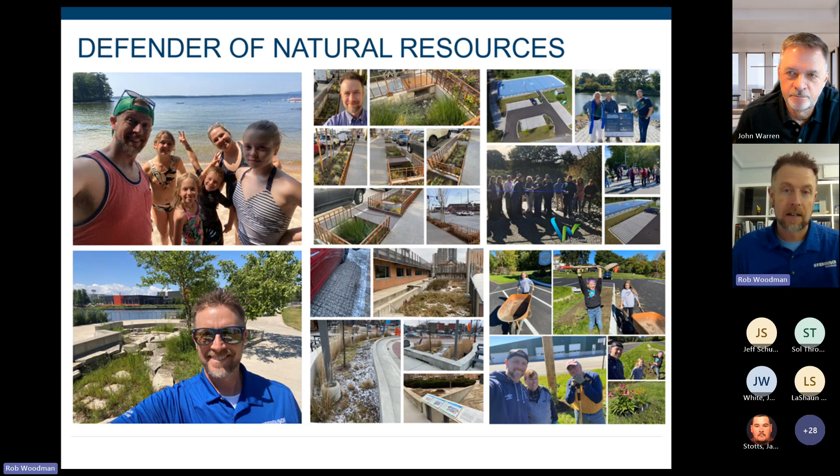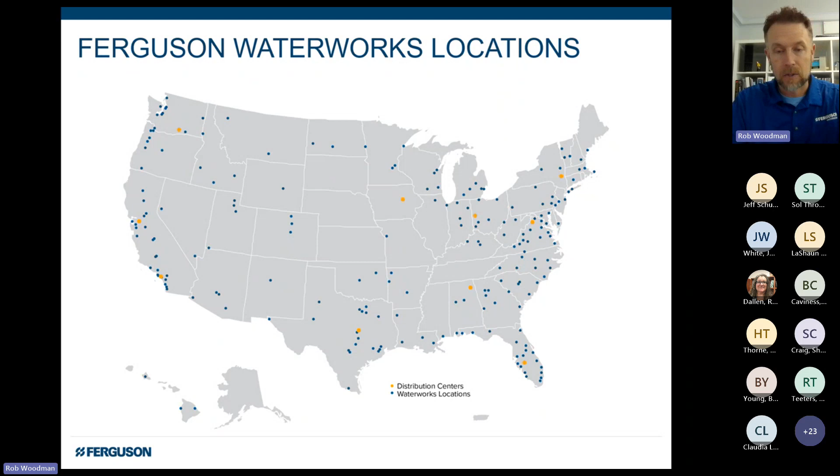When it comes to managing wet weather on the private and public side, what I hope to do in these presentations is share some of what I've learned in other parts and bring it back to you locally in a way that might positively impact how you're going about implementing stormwater and retrofit projects in your neck of the woods.

As a starter, we do everything in that site development space. So whether it's silt fence, dewatering bags or silt sacks, TRM - turf reinforcement mats, erosion control blankets, geogrids, fabrics, vegetated walls, scour protection, slope stability solutions - we kind of cover everything.

We're not going to get into these things today, but if you have any needs for these types of solutions, both myself and even more so John are a great resource for you. Don't hesitate to reach out. If anything on this map has you wanting to know more right now, let us know and we can set up a small 15, 30-minute call at some point to go through those things.

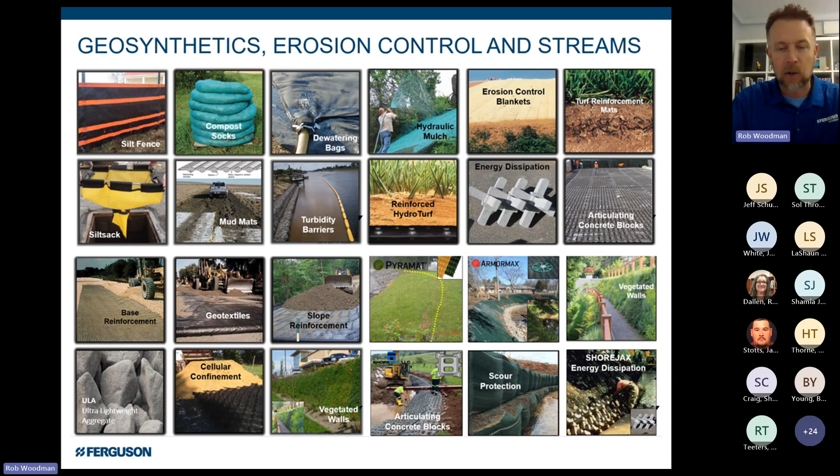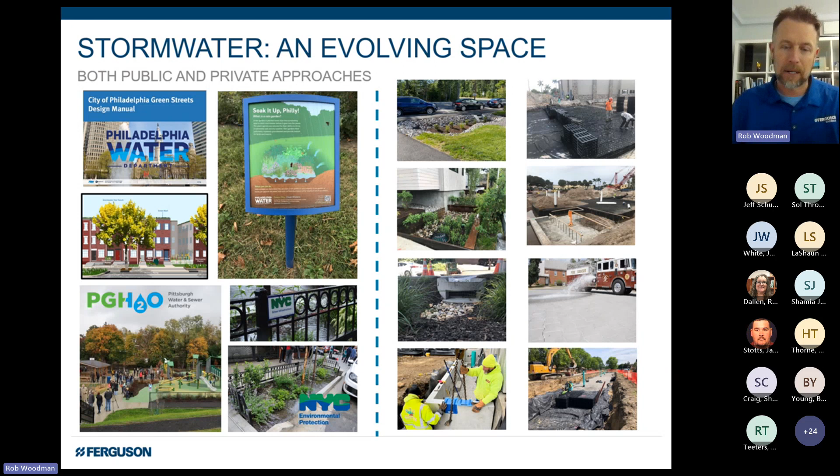But today we're really going to spend time in the stormwater space. We work both on the public and the private side. While there's a lot of similarities, both have their own unique challenges, and we try to address those in the different approaches we have, or the influence and leverage we have when it comes to supporting designs we're on. We keep finding a lot of key challenges or common issues that come up, and we've built our suite of solutions to address those.

Space efficiency is probably the biggest one. We've got less and less space to work with, we're dealing with poor soils, and we've got to do more with less space. At the same time, precipitation is increasing, so we're getting more regular, more intense rain events. We're having to adjust the way we size when we think about resiliency and climate change, and we're trying to position our solutions to be helpful there.

We've got to be versatile and flexible. We have to work around weird conflicts that you might find when you dig a hole in the ground. High performance, whether that's for structural integrity or for water quality. Easy to maintain - no longer is maintenance just a nice little manual that gains a thick layer of dust on the shelf.

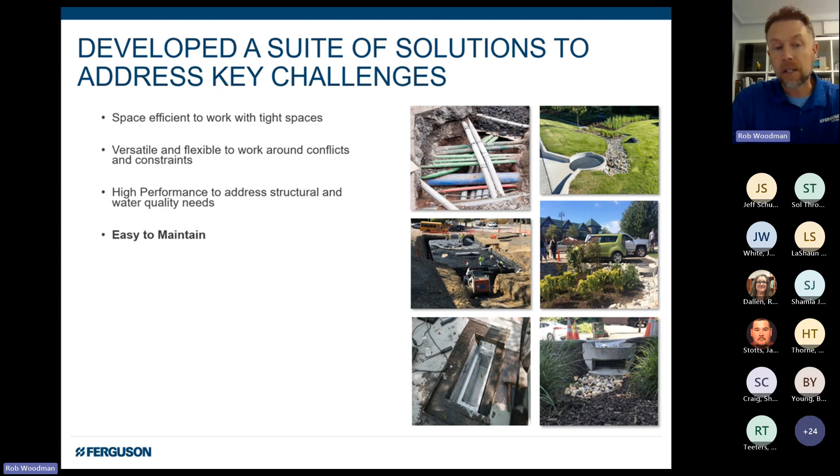Folks are actually having a look at what it looks like to not only install practices, but then deal with the ongoing cost and workforce needed to maintain and help them look good and continue to work moving forward. Cost appropriate is always important, along with the ability to adapt for resiliency and manage some of these pieces that are coming into play now with larger storm events that we're having to manage.

And then from a city scale, probably more on the public side of things, one of the challenges I've seen as I've consulted with New York City and Philly and other areas is we keep coming to this conclusion that we need better pretreatment, better screening, a better way to protect our primary assets. Because when we protect those assets, we allow them to do what they were designed to do. And the focus of maintenance now becomes simple filters and screens, which are easier, lower cost, and quicker to maintain.

And if you do all three of those things, the chances of maintenance happening generally goes up. So you're going to see that smattered throughout the presentation today - this common theme of essentially voluntary pretreatment, not always regulatorily required, but a really good way to protect and keep the life cycle costs down with any kind of either subsurface or surface green infrastructure practice.

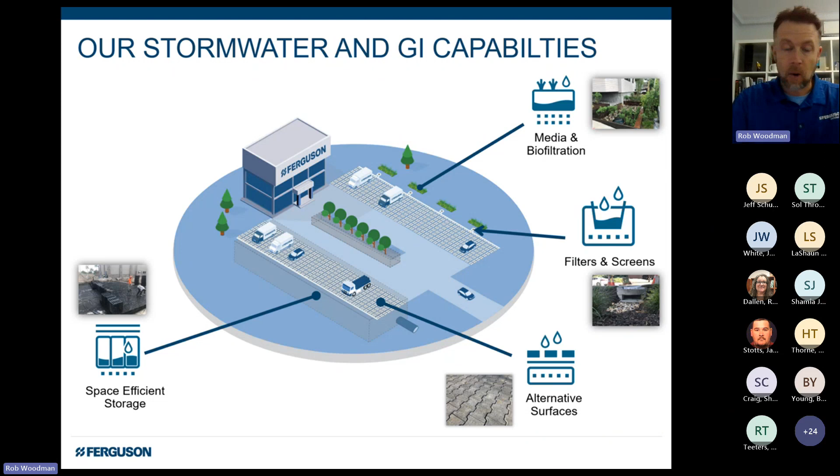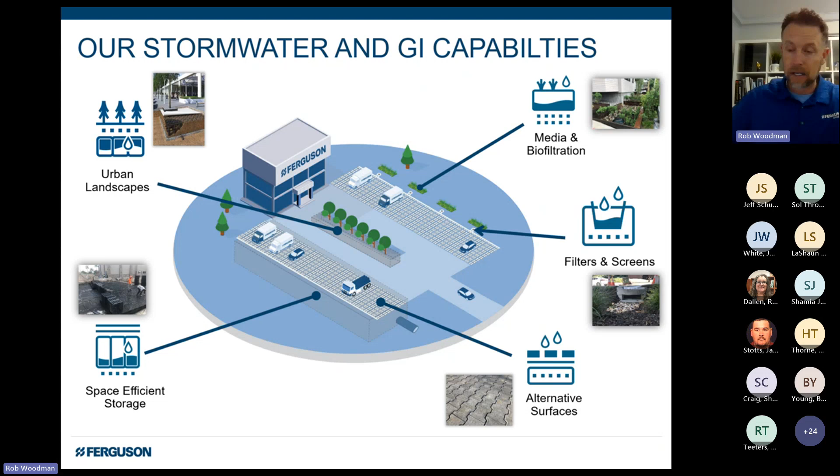So diving into it, we're going to go through 5 chapters. We're going to talk about space efficient storage, filters and screens, media biofiltration, what we call alternative surfaces or permeable or porous surfaces. And then finally, we're going to touch a little bit on what we call urban landscapes, where we're actually using soil cells to promote tree health in urban settings.

On the space-efficient storage side, Ferguson is a distributor of many, many different products, and we're a large distributor of Waterworks products.

So we get access to a lot of different systems. We work with arch chambers, large diameter pipe, concrete storage systems. But today we're going to really focus on the lower right here, the R-Tank. R-Tank is an own brand product of Ferguson's.

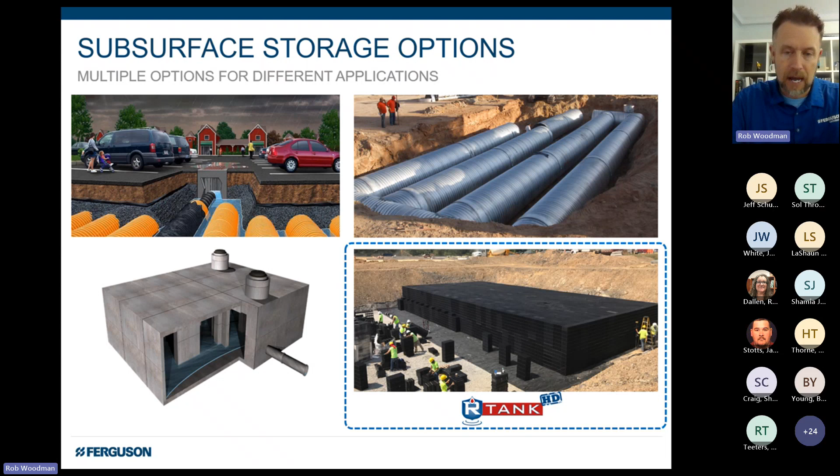And again, the more and more we get space constrained, the trickier some of these sites become, and R-Tank becomes a more and more useful solution. We have R-Tank systems going in across the country every day to solve issues related to stormwater storage. So the R-Tank, it's a very simple concept.

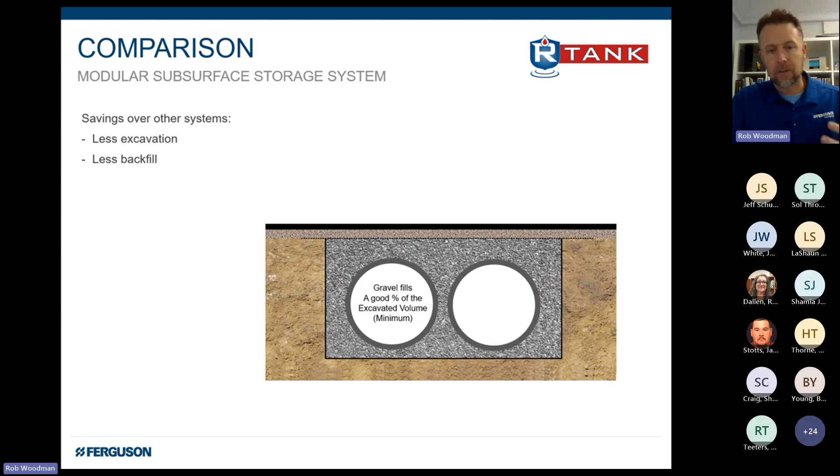Instead of using your typical pipe with stone backfill or your arch chambers with stone backfill, we're using a 95% void space module to really maximize the storage. So we're minimizing excavation, maximizing storage. And that's really the key with R-Tank. It's that high void space, the ability to maintain traffic load ratings, which we'll talk about in a minute, minimize excavation, maximize storage.

Like I said, high void space allows us to keep systems shallower so we can avoid groundwater. Our modularity, which we'll talk about in a second, allows us to work around unexpected utility conflicts in the field. We've got different height modules, anywhere from a mini up to a single plus mini, double, triple, quad, finally up to a pent, which is essentially five segments high. It's about 7 feet tall.

And if you look at my camera, this is a miniature model. This is not the real thing. This is actually essentially a double module that I have here. And you'll see that it has a common mid plate. So when we assemble a double, it's made as one monolithic matrix of plates. We're not dealing with two independent pieces sliding around on top of each other.

There's a few other systems out there that do that, and they've had some troubles because if things aren't perfectly lined up, you don't transfer the load correctly, and then you can get into a bit of a pickle. So we make them all as a monolithic matrix of plates. We have different strength ratings for different cover conditions.

Our heavy duty or HD, minimum of 20 inches of cover, up to 7 feet of cover. Our super duty, up to 10 feet of cover. The UD or ultra duty only needs 12 inches of cover to be HS25 load rated, which is pretty unique. There's not a lot of systems out there that can support that traffic that close to the surface. And then we finally have what's called our XD or extreme duty panel.

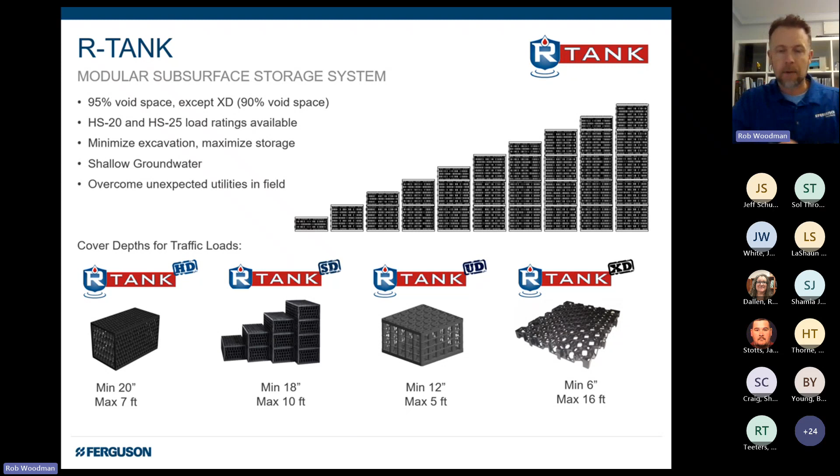It's a 2-inch panel that can be stacked in multiple lifts that we can use with very deep or very shallow conditions. As you can imagine, they get a little bit more expensive as you go from HD up to XD. So on projects, we generally start with the HD. We try to see if that can work with the various site constraints and specifics. And if it doesn't, we can steadily work our way up through the range from there.

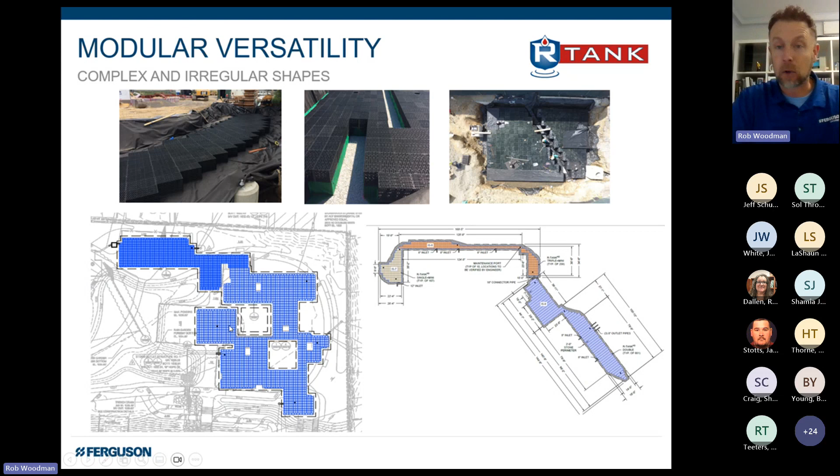Again, being a modular system, the tank's about 3 square feet in footprint. So we can work with complex shapes and work in and around different obstacles, which is a really nice thing. This is a project we'll talk about a bit later, but it had some spaces left out for some deep playground equipment foundations, actually. So we're able to work around that and get it done.

We also have what we call maintenance modules. If you look at my camera again, you'll see we have modules that have circular plates in them versus the standard plates that are more of a webbed kind of plate. We use these tanks at the points that pipes enter the system. You'll see here the red line on the engineering section, where pipes enter the system.

We'll wrap that row independently with fabric to trap sediment and debris or isolate it into one location, where we can, with a combination of ports at each end as well as inspection ports throughout, flush, resuspend solids, and vac them out. So that's our treatment row or our maintenance row.

While we have that, I'm honestly a big fan of upstream pre-treatment for any system, whether it's pipes, chambers, tanks. It really doesn't matter. I'm yet to meet any owners on the private or public side who get super psyched about spending their extra money on cleaning subsurface storage systems. So we find that pre-treatment's really a good place to go.

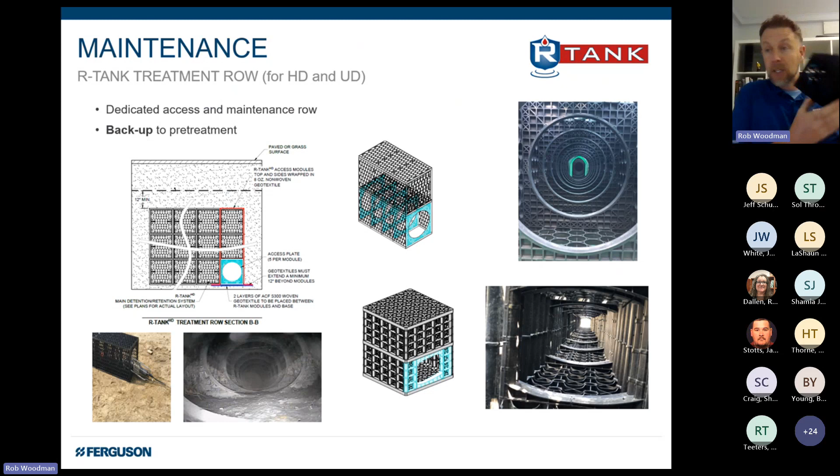And that's a trend we're seeing, especially on the public side, folks looking at smart, decentralized filters and screens just to keep that material out. It's much easier to clean a catch basin than to be searching for material all over subsurface systems. But we do have that circular plate as a backup should you need it.

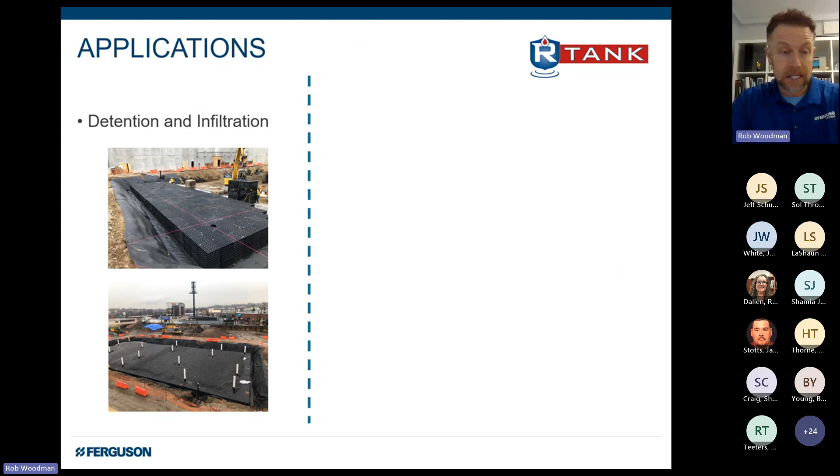You could probably also imagine, most applications for this is stormwater detention and infiltration, depending on your soils. But we also have folks now using it in a lot of more unique or innovative ways, right? So enhancing storage under permeables, folded into linear green streetscapes, under bioretention. So instead of using, say, stone at 35 to 40% voids, we can increase that void ratio to 95% and get a lot more storage. So enhanced storage under bioretention, combined with innovative medias, which we're going to talk a little bit about later when we get to our media and biofiltration section. And then also harvest and reuse, right? So a lot of different ways to do it.

Typical section, pretty standard, 3 to 4 inch stone base, set those tanks, wrap them with a fabric. We do call for a 2-foot stone side perimeter, just so you have enough room to get in there and work that material up in lifts. There's a number of systems I see out there in their standard details that only call for 6 inches or 12 inches. That's really not enough room to get in there with a plate compactor to build that up. So we recommend 24 inches. On some of our linear projects, we're a little bit more flexible and get down to about 12 inches, but we try to start with 24.

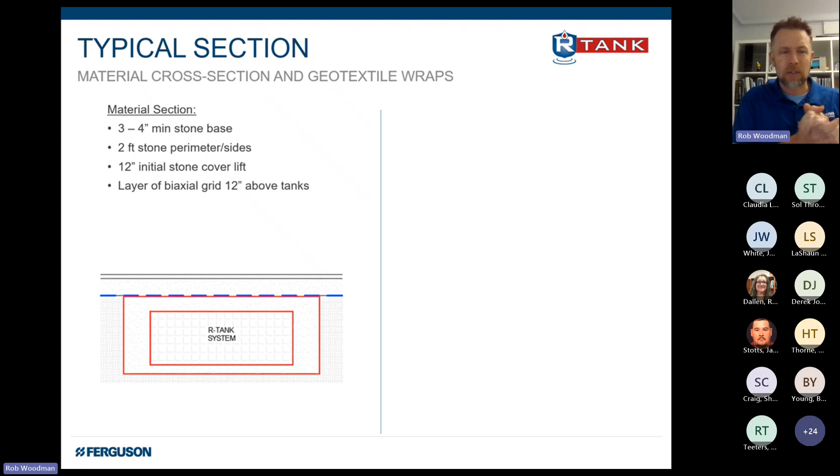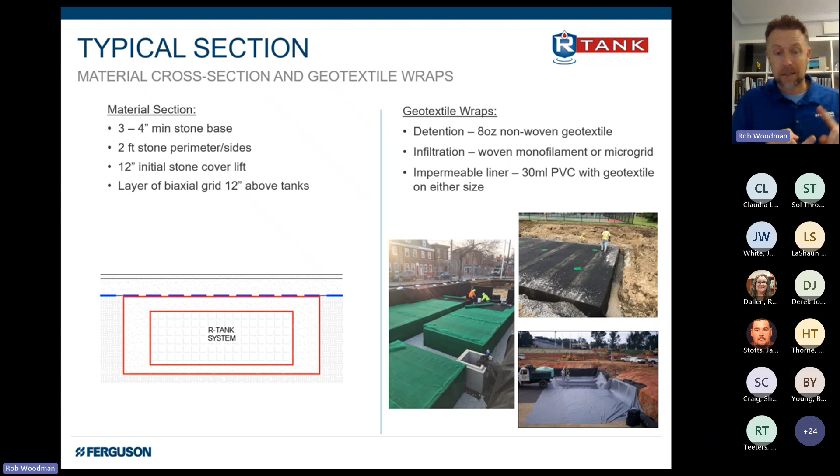And then again, we're wrapping tanks with fabric. We're a geo company, so we're not just shipping tanks to the site. We provide the tanks, the pipes, the inspection ports, the boots, the fabric wrap, the liners, all the different parts you need. And we have recommendations for the geos depending on what your application is. So if you're doing detention, we generally use an 8-ounce non-woven. Infiltration, we'll use a woven monofilament or even a microgrid material you might see on the screen here. So like these small biaxial geogrids that we can use just to stop backfill from going into the tank, but essentially be clog proof. And then when we need an impermeable liner, we'll generally use a 30 mil PVC.

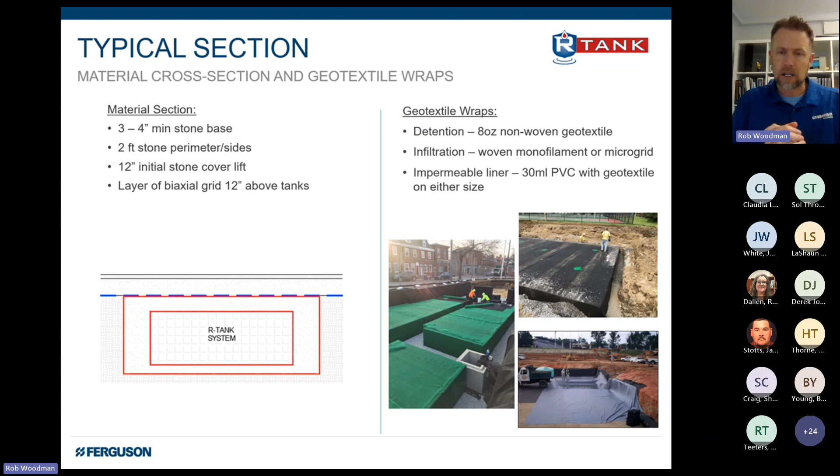We supply HDPE, LLDPE, RPE, PVC, all the different liners, but I would say 90% of the projects we ship have a PVC liner. And I think that's because PVC is pretty flexible, even in the colder months. So it's easy to work with, and you can use a specialty glue or adhesive to seam the seams when you're connecting parts and pieces versus needing specialty heat guns or welding equipment to do that.

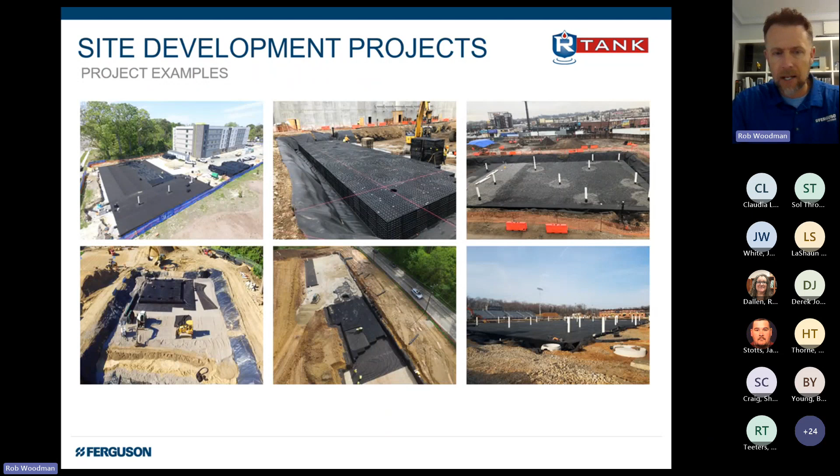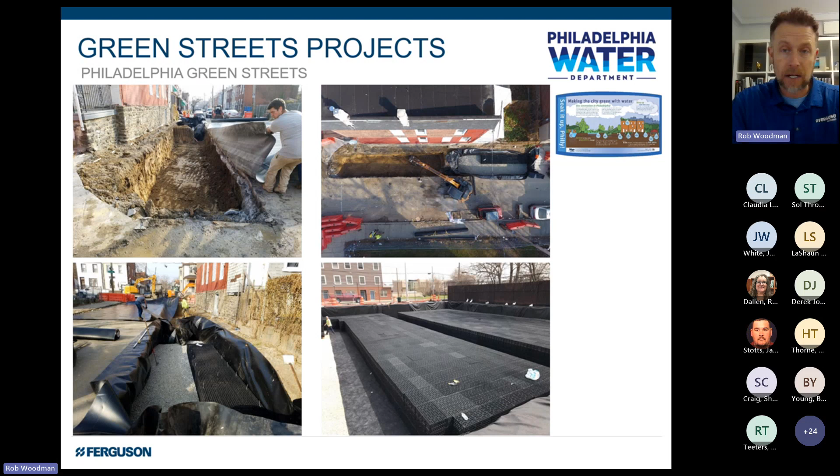Examples: parking lots, stores, hotels, sports fields, all kinds of different uses. Again, linear green streetscapes. We do a lot of work in Philly where we do small numbers of tanks in the urban right-of-way to provide volume storage. Pittsburgh's an area I've also done a bunch of work, where Pittsburgh has steeper streets, so we do a lot of terraced systems there to work with the adjacent grades. And again, I showed this image earlier with the playground, but you can see again how we can work around all these different constraints, whether it's deep tree areas, light pole bases, foundations, those types of things. We can work in and around those.

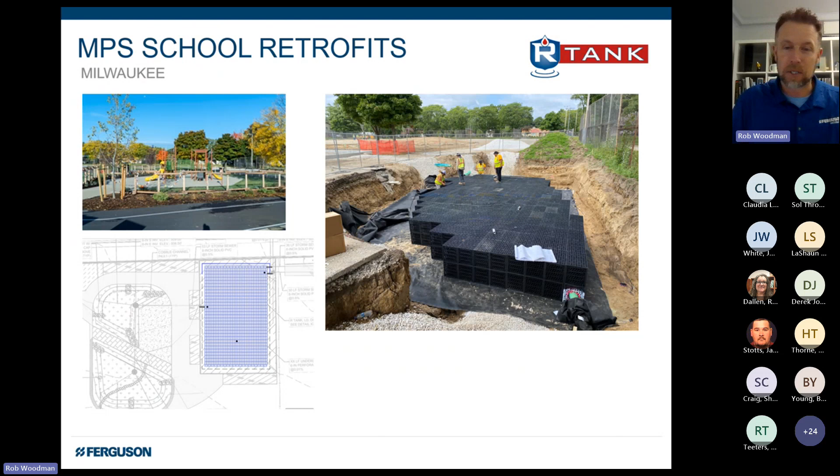More recently, we've started to be folded into a number of school-based grant retrofit projects. So we've got a number of projects going in the Milwaukee area, really cool projects, actually. Old, often fairly low income areas, so not the greatest neighborhoods, but taking school sites and turning their playgrounds from a paved playground, basically just a bunch of pavement, to a nature-based, green infrastructure rich playground, which is really fun. I think we've worked on 9 of these projects now over the last couple of years. We got another 5 this year. And it's really cool to see the way that green infrastructure isn't only helping with stormwater, but now providing a community amenity that really benefits the kids in these pretty rough areas.

Under permeables, I mentioned before, we can fold them under permeables. If you follow what's happening in New York City, the DEP is now using a precast porous gutter line detail for a lot of their retrofit projects. We'll talk about the precast concrete later, but what's interesting in those standard details is they call for either 3 high or 5 high of our 2-inch XD panels. So it's a 6-inch section or a 10-inch section underneath those. And so it's kind of interesting to see the way those modular boxes are becoming useful, even in an urban right-of-way, like we see throughout Queens and Bronx, Flushing and whatnot, all the projects that are happening over in NYC.

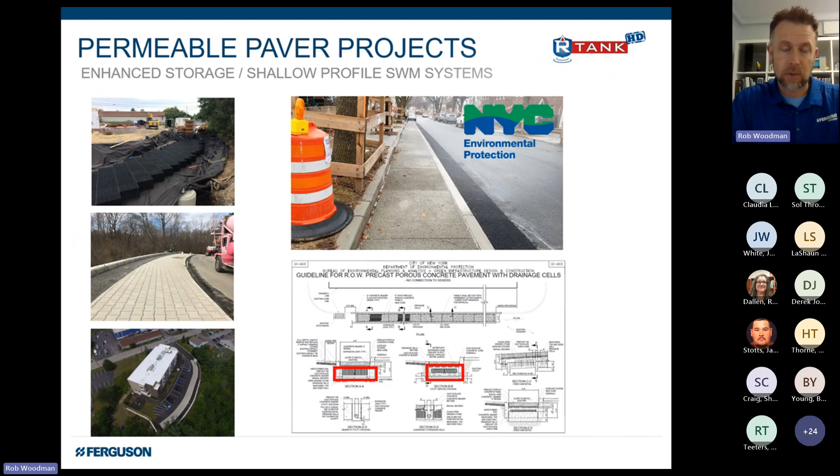I mentioned another use, harvest and reuse. This is newer for us, but we now have a formal partnership with a company called Greyter Commercial, who essentially provide a modular filtering and pump system. So we can provide the R-Tank to the appropriate size, line it with a PVC liner, and then work with our partners at Greyter for them to design the appropriate filtering system, depending on what your use is, whether it's for irrigation or say for gray water for toilets, flushing, splash pads, whatever it may be.

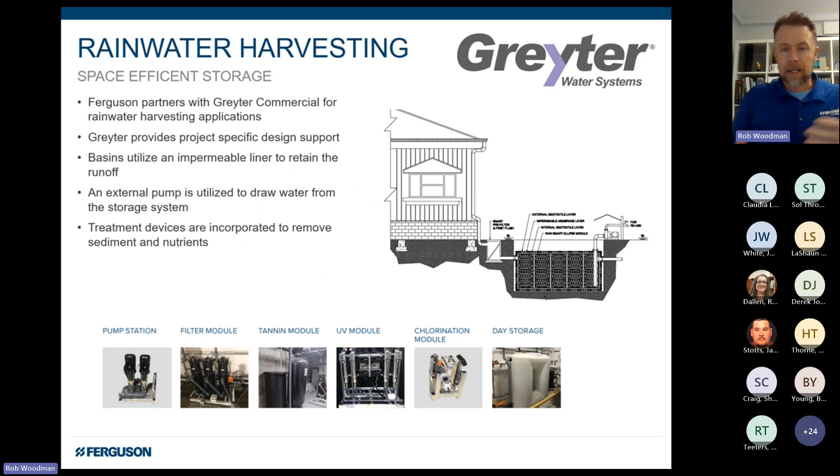That can all be packaged as one system now, which is kind of a fun thing because we're seeing more and more people say, hey, look, I've got to store this stormwater. I got no ability to discharge it from the site. I need to do something with it. Or, hey, I'm super sustainably minded. I really want to keep the water that we're generating and use it for something. Can you help? And in the past, we're like, hey, here's the R-Tank. You work out the rest. Now we can kind of do all that together.

I see a couple of comments there. Yes, splash pads. It would have to go through certain rigorous filtering before you'd start splashing kids with that water. But we can talk about that for sure.

So I talked about the treatment row with the circular plates. I think I mentioned then we kind of recommend that as backup to pre-treatment. When it comes to pre-treatment, there's a lot of devices on the market, and there's kind of two approaches. There's what we would call a centralized approach or decentralized approach. Centralized is usually a larger swirl separator or a hydrodynamic separator. Decentralized is usually some kind of lower cost, simpler filter or screen that might go in each catch basin upstream of a system like R-Tank.

And we have a whole range of them. We're not going to go through all the features and benefits of each, but whether you like screens that are down in structures, or high flow geotextile bags, or even cartridge filters for specific pollutants in the frame and grate. We work with Fabco Industries in this space. They're based out of Long Island, New York, and they've developed a bunch of really nice solutions for us.

The most common device that we use with Fabco is what we call our StormRing CPS, or connector pipe screen. This is actually a standard screening device we put with all of the drawing sets we produce for our R-Tank designs that we're working on with engineers. We used to have a screening device that actually mounted to the wall of the structure, but we kept finding that oftentimes the wall wasn't square, it wasn't flat, it was an older drain, it was kind of hard to mount to it. But the pipe itself leaving a structure was generally pretty circular. So light bulb moment, why don't we mount the screen to the pipe versus the wall?

And so the StormRing, the reason it's called a ring is it's an expanding ring. So this ring actually gets slotted into the pipe that's leaving, say, a structure. There's this turnbuckle in there to press that to the wall of the pipe to make it hold steady. And then we mount a kind of a triangular screen to the face, really to increase the surface area, so you're not just limiting the surface area to the circle of the pipe itself. And this is a simple device available in aluminum and stainless, and we go from 6-inch all the way to 24-inch.

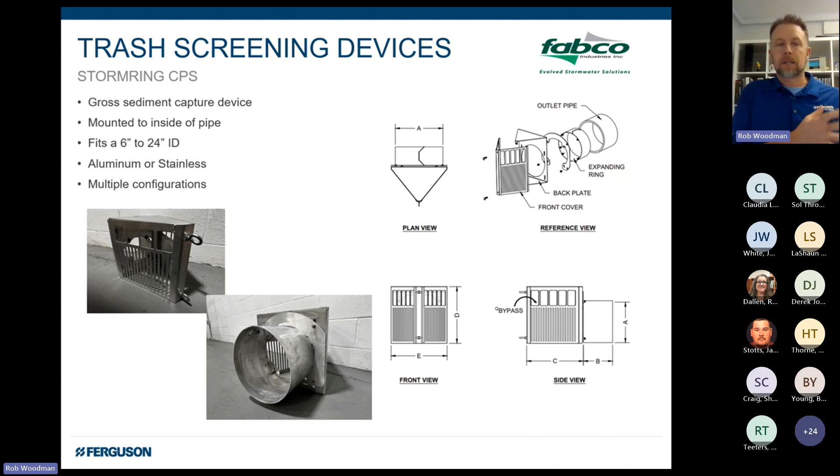And if you're working with us on an R-Tank design, if there's no apparent plan for upstream pretreatment and screening, you'll see this detail appear on our standard drawing sets as kind of a recommendation, like, hey, let's do something. It's not going to cost you a lot, but let's do something to make maintenance down the road simpler. StormRing will allow you to do that.

And then I'd also just mention, while we have a lot of devices, we've also found that we've needed to make specialty devices for various cities and towns that we work with. They might have a certain type of drain or a certain size particle they want to trap, but then another size they want to let go. And we found that every city is kind of unique. City-specific goals need city-specific solutions.

We've developed the green inlet filter series with the Philadelphia Water Department for Philly. We've also developed the inlet screen baskets for New York City DEP for their right-of-way infiltration basins. You can see that metal basket there and some push-on pipe screens that actually go behind it.

I put this on the board just to say, you don't have to be in Philly or New York to garner our time. But we realize sometimes we need to create something that works for you, either based on available space or the type of screening you're trying to provide.

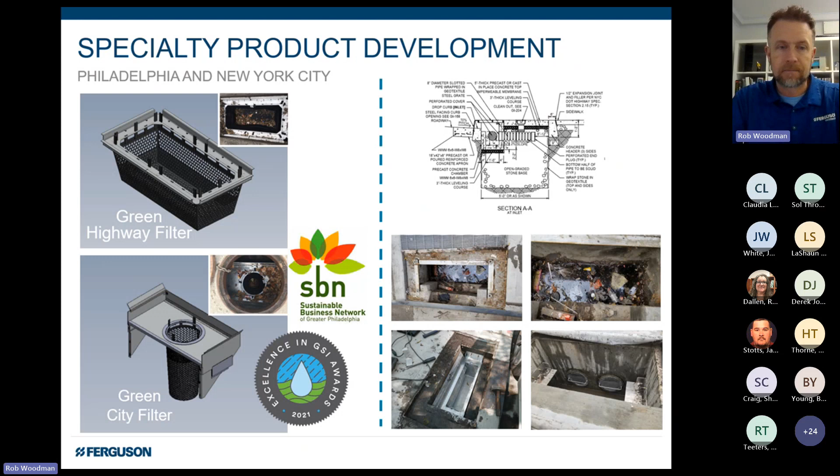So those kind of screens work for subsurface systems like R-Tank and the like. But when it comes to surface systems, things are a little bit different. Surface systems meaning, say, rain gardens, bioretention, biofiltration, bump outs.

When we think about rain gardens and bioretention, often we think, hey, we want them to look awesome. We want them to be able to filter pollutants, so provide that water quality piece. We'd love them to be maintenance free, but nothing, unfortunately, is maintenance free. Spoiler alert, if you thought maybe something would be maintenance free.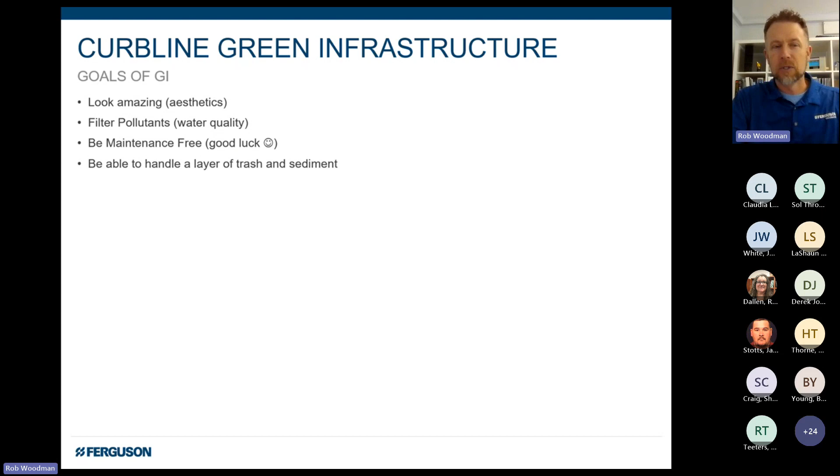But we also send all this erosive velocity and sediment to these systems, so it's a little bit tricky to really reduce the maintenance and protect these systems. We found if you have pretreatment in place, it makes it more likely you can achieve those upper goals. Pretreatment traps sediment, so you're not going to smash your plants with it or coat your surface bioretention media with it.

We can dissipate energy, so we're not going to blow out the plants. We're centralizing maintenance to some kind of screening pretreatment device versus having to hand fossick for that material all throughout your bioretention system. But we kind of get into challenges because we're trying to dissipate energy and collect sediment and debris.

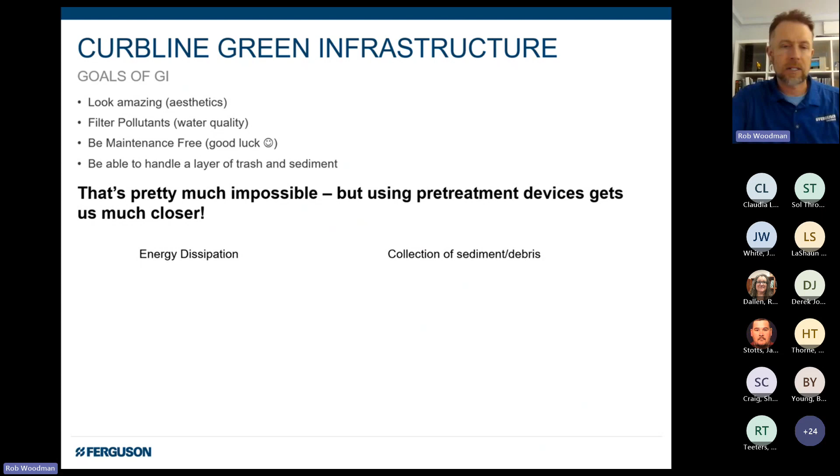If you're on a large private site development with a bunch of room, you can fit in a forebay or something nice and it's going to get the work done. Unfortunately, in the urban right-of-way with these curb line type systems, you just don't have the space to fit those practices in. This is a real challenging point.

From anywhere I travel, anywhere I look at BMPs or meet with folks to talk about them, the biggest problem location for these types of practices is that curb opening. How can we do a better job? I think a lot of times folks have just used riprap or cobbles.

Makes sense in theory, but in practice that sediment's getting bound up in there and also getting past it. So maintenance is pretty laborious because you're moving all the rocks out of the way, brooming out or vacuuming out the sediment, then putting the rocks back. It can take some time.

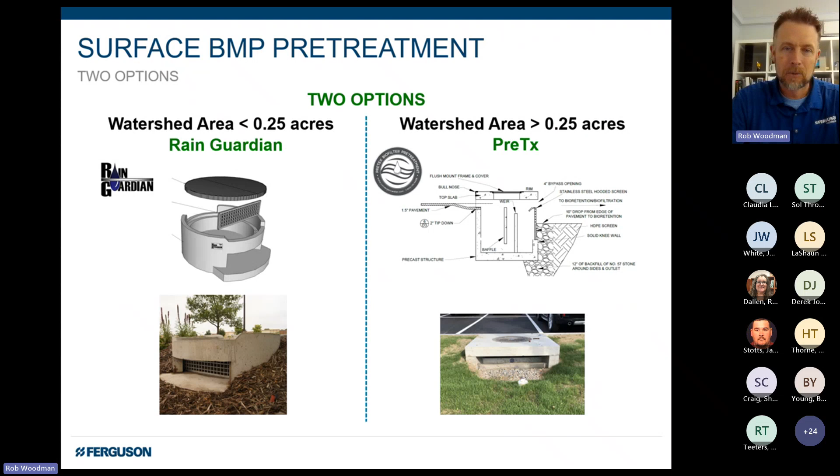So we have two devices we use in this location, and these have become really popular around the country because people are catching on to the fact that they could probably do something a little bit better to protect those systems. We have two units: one's called the Rain Guardian, the other one's called the PreTx.

The Rain Guardian is a little precast unit. I can hold up a little miniature model—it has a horizontal grate on top where a lot of the trash is going to sit, and then a vertical filter wall on the backside where any sediment and finer stuff is going to be trapped before you get out.

Yeah, Jacob, question? Hand was raised. Jacob, feel free to unmute yourself and ask Rob a question. Sorry, I think that was just a fat finger error. My bad. Oh, no worries, all good. We'll call it a high five. That sounds good.

Anyway, so these units are designed to dissipate the energy, trap the sediment, and really centralize where you do maintenance. We have one called the Turret we use on the curb line, a rectangular one called the Fortress we use when the geometry doesn't make sense for the circular, and then one called the Foxhole, which allows you to get behind sidewalks or under sidewalks.

So this still has the horizontal grate—you can see just a little bit of it there—but it also has a solid cover up at sidewalk grade, so you get your continuing pedestrian and bikeway. Usually folks will use trench drains to get water through a sidewalk, which is great for conveyance, but it doesn't have the filtering and screening elements.

So these devices, when we started working with these 5-6 years ago, folks were like, oh, it's really interesting, but I don't think we need to do it. We'll just do some riprap. Those same folks are coming back to us now saying, actually, about that Rain Guardian, we may want to relook at it. And I think a lot of that is because pre-treatment is not often regulatorily required. And when something's not regulatorily required, it often seems kind of optional for developers in particular.

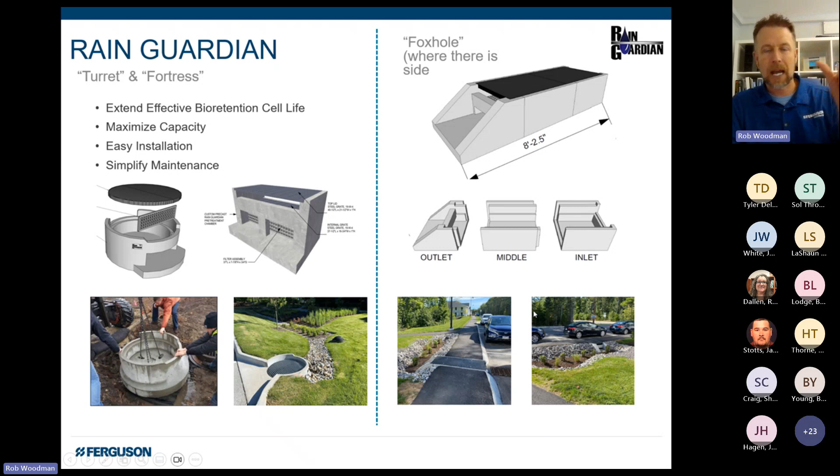The ones that don't have the pretreatment would be kind of the opposite of that. So they really do their work. And I would argue that in one maintenance visit, you're probably going to get the return on the investment in terms of that cost differential between putting something like this in or not.

Then we have the PreTx, which is a deeper piece of precast. So it's just for larger watersheds. We've got a formal sump now, a suspended baffle, a weir, and a screen on the backside. So that's just for the larger watersheds.

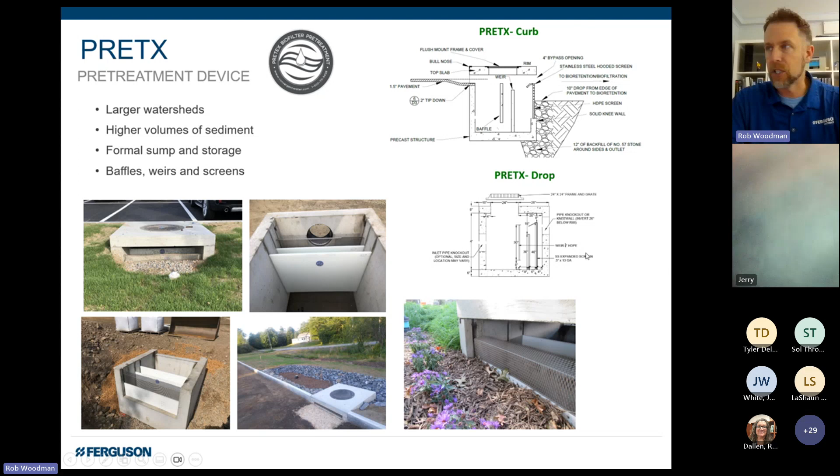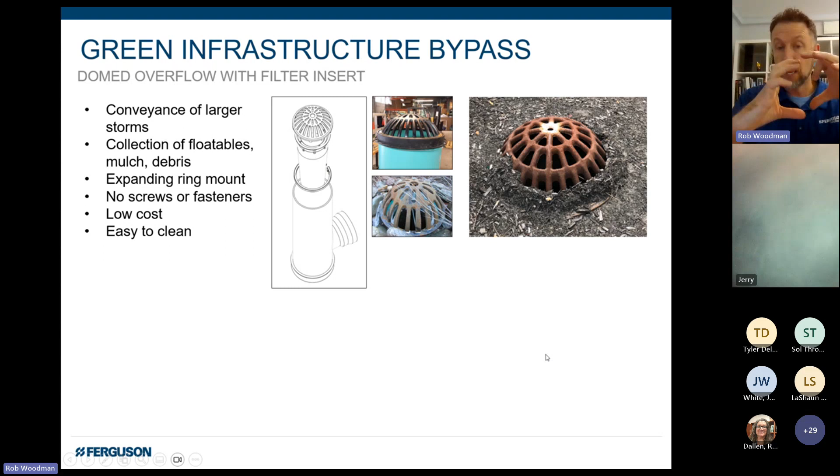We also have found a problem area at bypass locations. So a lot of surface green infrastructure will treat a certain amount of runoff, an inch or an inch and a half, or some kind of 1-year event, whatever it may be. And then larger events bypass, usually through some kind of internal overflow, like these domed overflows. We found that that's also the place where you get this kind of cocoon of mulch, and a lot of that sneaks through and can potentially clog small under drains or even orifice controls that exist downstream.

And so we now put in high flow geotextile bags in all of our domed overflows. This is an extremely low cost item that you can retrofit existing overflows with, just so you have a place where you're going to trap that material. And while these baskets don't fill up rapidly in the course of a year, enough material accumulates in these to make me think, yeah, I'm glad this is here, because otherwise you wouldn't be accounting for that. It would just be going somewhere downstream and potentially clogging things.

So we've seen a number of cities that we work with now retroactively put these in their bump outs or even include it as a standard detail so that there's some of that protection for the bypass.

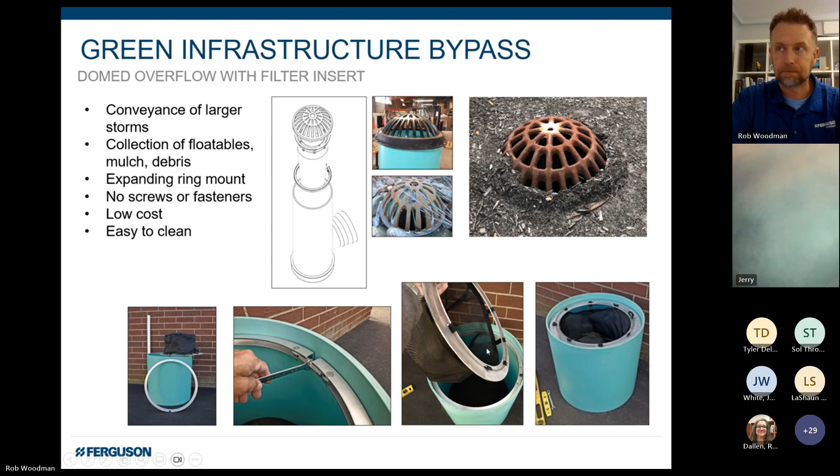On the median biofiltration side of things, we work with a company called Convergent Technologies that makes a product called the Focal Point. The Focal Point is a high flow biofiltration system. We're not going to spend a ton of time here today, but if you're not familiar with high flow biofiltration, the basic idea is you're using high flow rate media. So we use 100 to 160 inch per hour media.

So instead of having a large bioretention system that maybe is processing water at say 2 to 5 inches per hour, we're speeding that rate up considerably, up to 100 inches per hour or more, which allows us to justify shrinking the footprint. So the focal point is generally going to be about only 8 to 10% of the size of a typical bioretention or rain garden. We've gone through some great testing to get through a number of regulatory approvals where proprietary products need those.

But the nice thing is when you have a small footprint, you have less disturbance. When you have a smaller footprint, you have less area to maintain, assuming you have good pretreatment. What I love about it, especially on the public side, is it now gives you opportunities to fold surface green infrastructure into locations that were maybe previously overlooked. So maybe you were looking at a space along the roadway and you're like, oh, a rain garden would be awesome, but based on the volume coming to it and the space available, we can only treat, say, 0.2 of an inch. With Focal Point, you could treat the full inch and a half in that same space. So that's a nice benefit. You can really limit disturbance and maximize performance.

And that's a common theme, right? When we think about our tank, what that offers, there's some similarities there to the Focal Point.

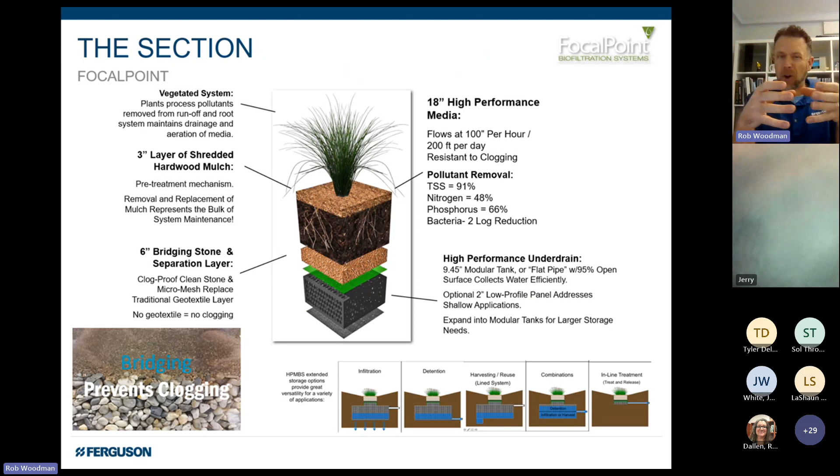That gives us water quality, not a lot of internal storage for volume control or water quantity, but then after treatment, we can expand our R tank out over a much smaller footprint. So instead of bioretention or rain gardens taking up that entire surface, or real estate area, where you can't do much else in the space, we have these smaller focal points drop down that can replicate what would have been surface storage, subsurface.

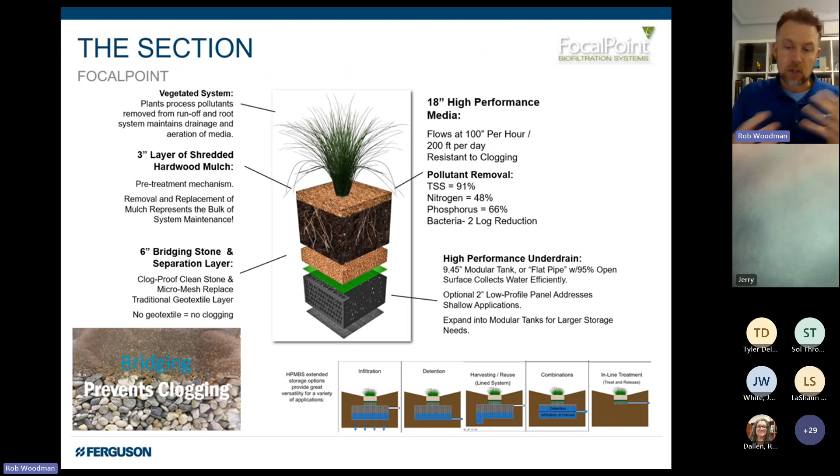Obviously, subsurface storage is always more expensive than surface storage, but when you're space limited and trying to maximize your parking or minimize your disturbance, you can do a lot of good work with focal point.

Oftentimes we think about water quality here and water quantity there, and we're not combining the two. But with focal point, we're kind of putting one over the other and can get it done.

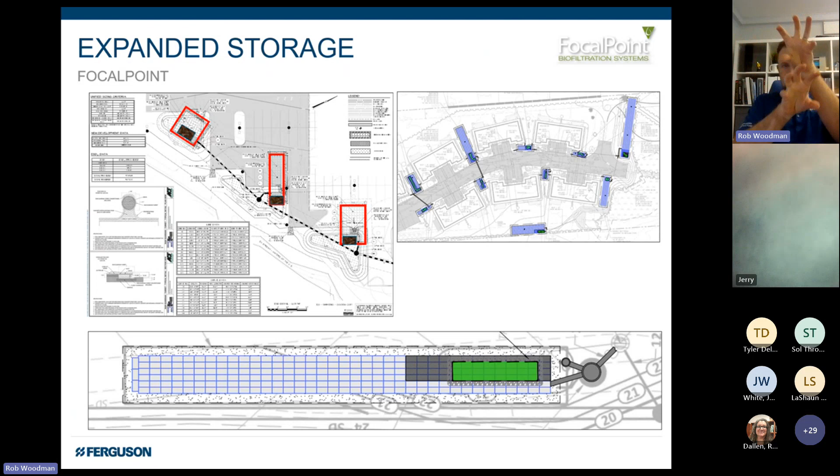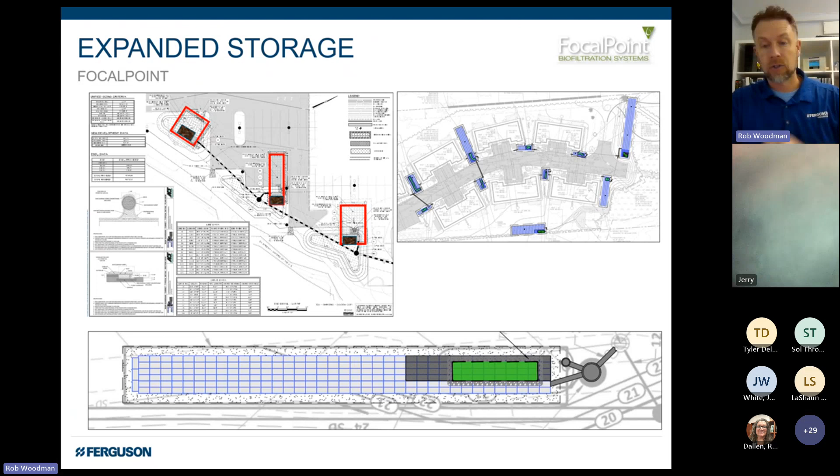Not all the projects we work on are like that. Some are just a bunch of focal points around the site, then piped to one central system, maybe chambers, maybe R-Tank, maybe a dry pond. Other projects, depending on how things are laying out and how the modeling is working, each focal point has its own independent storage, sometimes with its own independent outlet controls as well. So again, a lot of versatility, not taking up a lot of space at the surface.

It's also boxless. So everything comes in components to the site, and you don't need to buy an expensive concrete box. You also have a lot of flexibility with the shape. It doesn't have to be a perfect rectangle, as much as a lot of civil engineers I know love a good 90-degree corner and a nice rectangular shape. You can be more creative if you want to be daring. But everything comes in components, pre-mixed and certified.

Dig a hole, line the sides with a basic fabric, place the R tank, wrap it with a micro-mesh, bring over a bridging bag of bridging stone, place that in the hole at 6-inch depth, 18 inches of media. Finally, we temporarily cover it with fabric just until everything upstream that's feeding it is stable.

Pavement's down, slopes are established. Once that's done, we take the fabric away permanently and place the plants in the mulch. Then the system is active and ready to receive runoff. So it's a very straightforward process.

We put ourselves out in the field for all of the installation so it gets done right.

I won't get a ton into sizing right now, just for sake of time, but the important thing to know is that we only need 174 square feet of focal point for every acre of tributary area. So if you think about an acre of parking or an acre of pavement, that's basically one parking space worth of focal point.

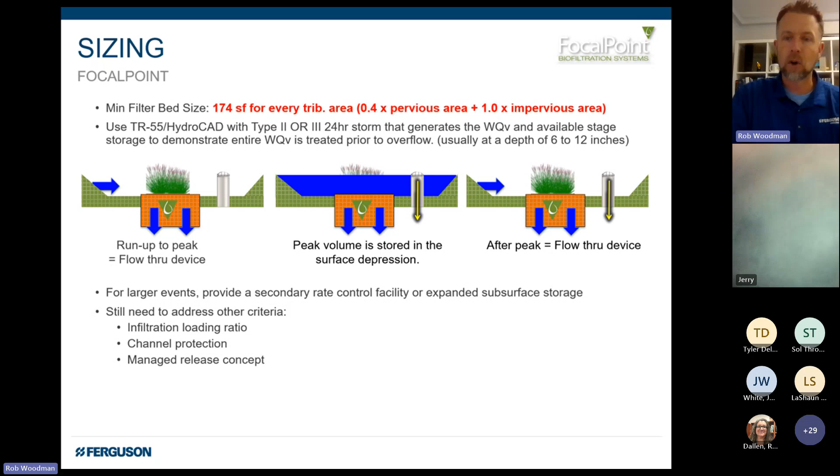Very small footprint. We model it through to make sure that we're actually demonstrating, at least over a 24-hour distribution, that the water quality volume is treated prior to bypass, essentially dynamically modeling that flow throughout the storm event.

That's for treatment. And then obviously, again, when it comes to the volume piece, whether it's for infiltration, channel protection, managed release, detention, or peak flow attenuation, we can expand the R tank out again over a larger footprint and get it done.

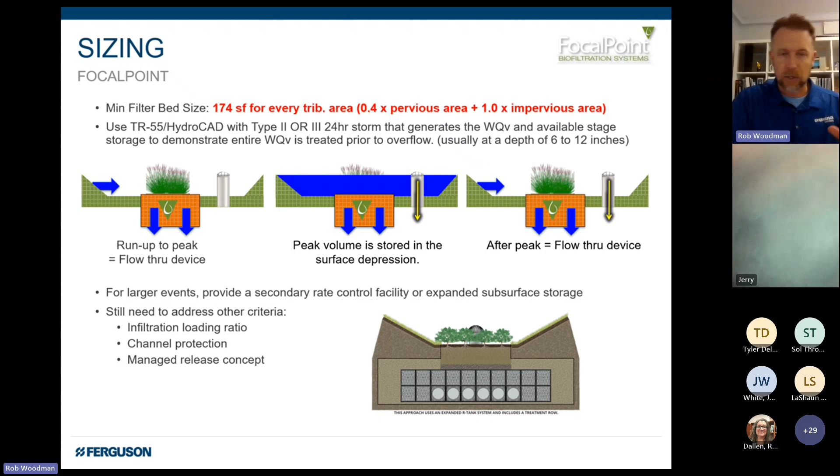If you're curious about the system, or if you have a project and want to talk more about how we model it and how we size it, be more than happy to connect and go through that. But I think the takeaway is it's nature-based green infrastructure with a much smaller footprint, which allows you, especially in retrofit applications, to just fit those things in easier.

Sometimes folks have the goal of phosphorus removal, so they need something with a media. Sometimes they don't, it's just TSS, but you're trying to leverage the community and social impact. So having something at the surface that you can put an educational placard near is going to help create a connection from the public to the work you're doing. And when you do that, it's sometimes easier to get support and funding for future projects. So there's different approaches to why something like this will make sense.

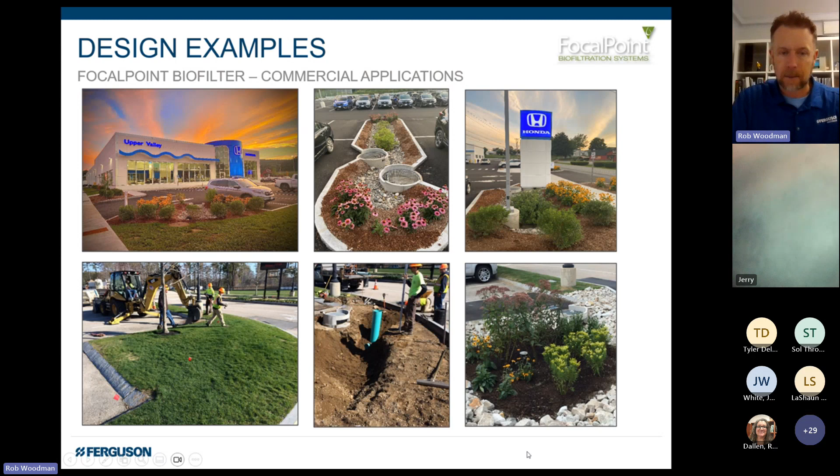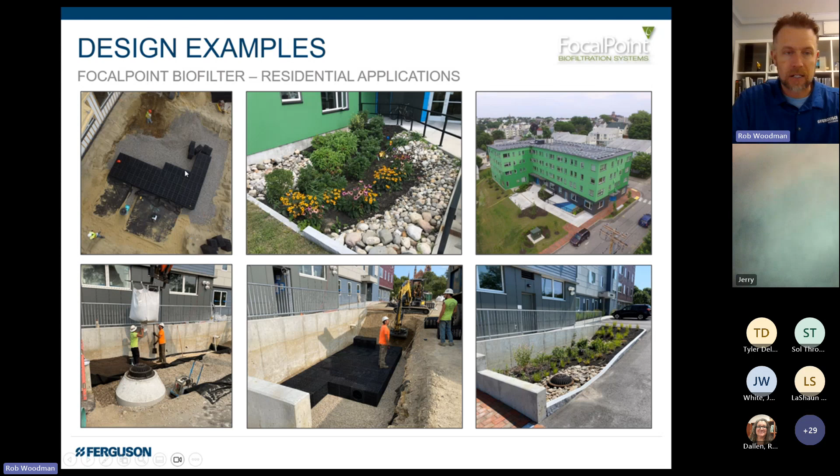So a lot of different ways to fold it in. This one isn't the most attractive looking focal point, but it's a pretty cool project. If you look at the plan view here, essentially the treated flow and the bypass come through, runoff comes off these pavers, goes through the rain guardian, gets treated, then enters these R tanks, or the bypass also enters the R tanks. But those R tanks are back underneath the paver drive area, right? So again, minimizing that loss of space at the surface, but in this case, still meeting phosphorus load as well as providing detention.

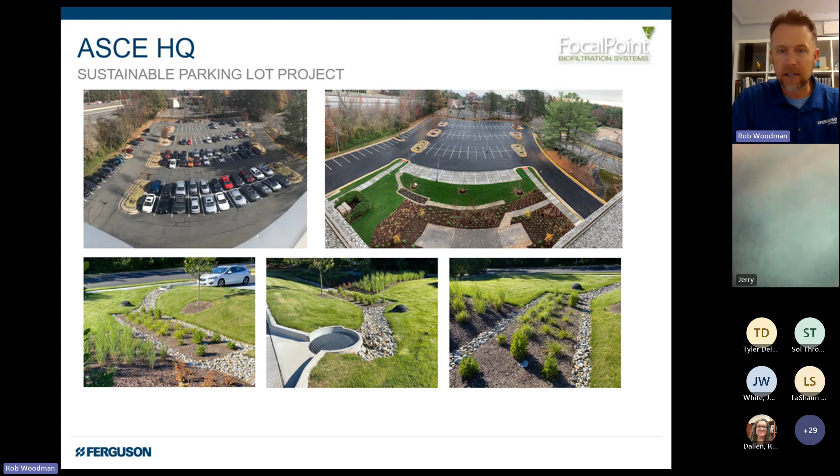We're at the ASCE headquarters. I worked on this project with ASCE, great little project, kind of walking the talk and retrofitting the lot with a bunch of different practices, including a nice rectangular focal point.

Roadway projects. This has become something that I really personally invested in 3 or 4 years ago. I'm like, hey, I'm sick of seeing these green practices just look terrible after a winter or look terrible after a year or two. What's the missing piece?

And kept finding that combination of pre-treatment, which you'll see in all of these examples, is really clutch in terms of protecting the plants, minimizing how often you have to replace mulch. And now you really just focus your maintenance on this location. More and more the term Rain Guardian, the name of that product, a little cheesy, but it's starting to make more sense because it's really providing that first line of defense, guarding the practice behind it.

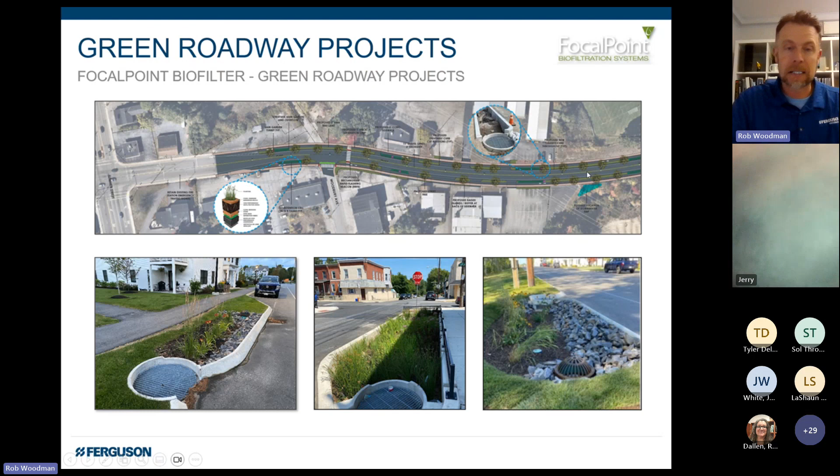And when you put that in place, the feasibility of folding green infrastructure, sustainable green infrastructure into linear tight spaces becomes a lot more feasible.

On the urban landscape side of things, one of the biggest challenges we see with projects is that folks are looking to get nice big trees like this.

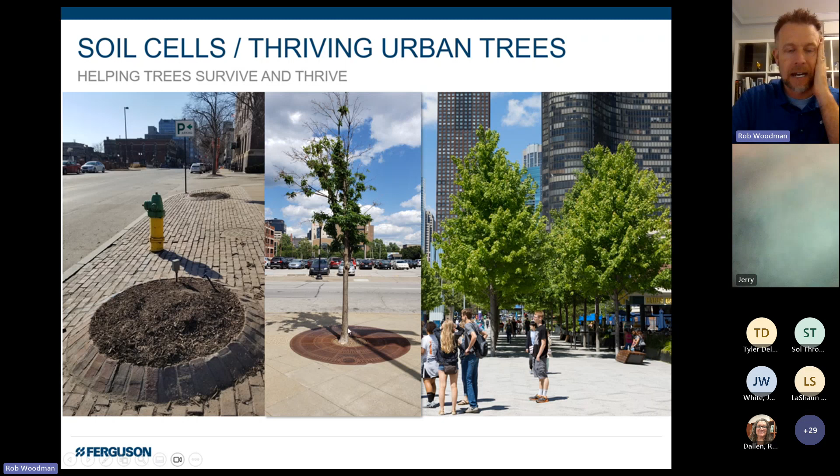Provide that shade, provide the cooling, provide interception, uptake, mental health benefits, aesthetics, all the things that come along with a good urban tree. Unfortunately, many of us see trees down the street that look something like this, or that many years after install look like that. And calling myself out as a civil engineer, I think as civils, we don't do a great job accommodating for these.

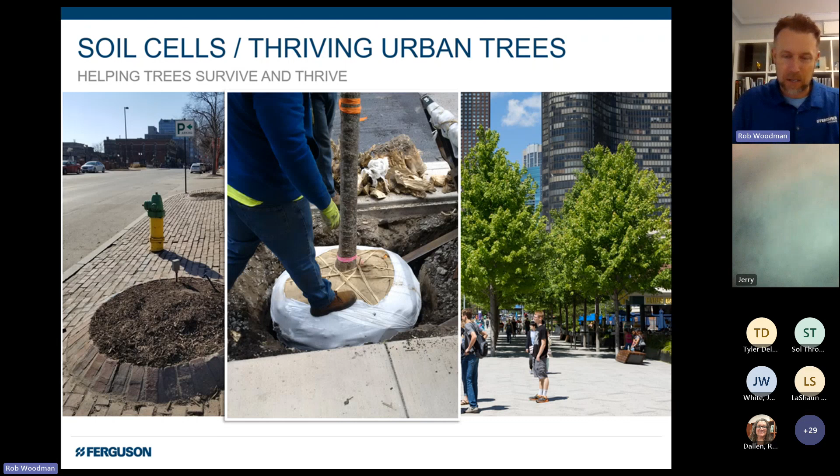Dig a hole, throw a root ball in it, pack some soil around it, and hope that things will be good. Well, trees need a certain volume of soil. In Oklahoma City, there's been a number of applications of soil cells. We have a product called the City Green Stratavault. This is similar to the Deep Root Silva Cell, which you may have heard of before.

Essentially, we're using a plastic module as our structural element to hold up the sidewalk, the pavers, the esplanade area above. But within that structure, we're able to place deep, rich, loose, uncompacted planting soil in a volume suitable for that tree to thrive. So we're restoring some of that nature's subsurface without compromising the integrity of the surface above. Historically, we'd see roots busting out of sidewalks, or areas with sags and potholes. We can avoid that with this approach while still providing an environment where a tree could get its required 1,000 to 1,500 cubic feet of soil, but in more of an urban setting.

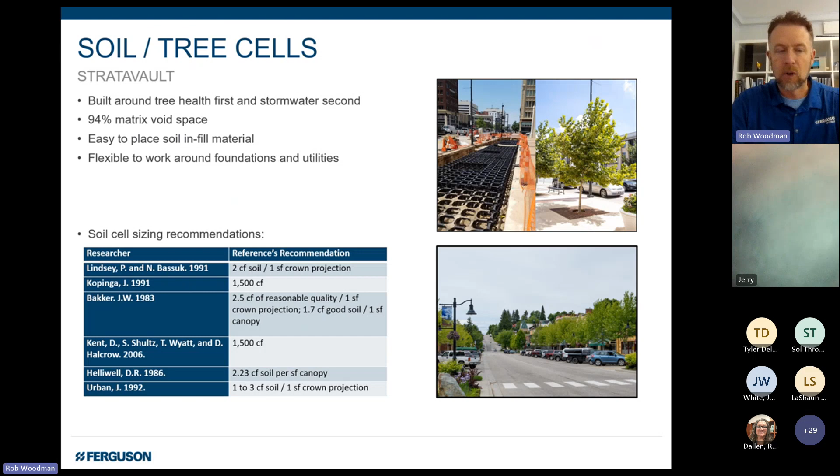It's been fun for me to look at these too. It seems like at every conference I go to, including the LID conference where Rebecca and I met last year, every case study we see now includes some kind of soil cell element. I think trees are starting to become more valued, and the value trees play in the stormwater space is becoming more understood as well. Trees aren't necessarily yet part of the regulatory landscape for stormwater, but with their affinity for water and for nutrient load, we're seeing those two parts start to collide more, with trees valued more in linear streetscape projects.

With focal point, it's a fairly sandy, stony media. I have a jar here on my shelf, I don't know if you can see it on camera, but it's not the kind of stuff you'd want to plant your vegetables in, nor would you necessarily plant a tree in it. So with focal point, we generally do smaller plants like perennial grasses, because it's a sandy, stony mix and trees aren't going to thrive in that. So we usually put the smaller plants there.

But then when it comes to tree cells, that's a great place for trees, probably why it's called a tree cell. We've started to dabble with some combo details where we use a curb inlet, go through a rain guardian, enter a focal point with some smaller plantings, filter down, and then have that filtered water enter a Stratavault system either side or around it, providing some irrigation to the tree. So we try to come up with ways to combine those pieces and have the two support each other.

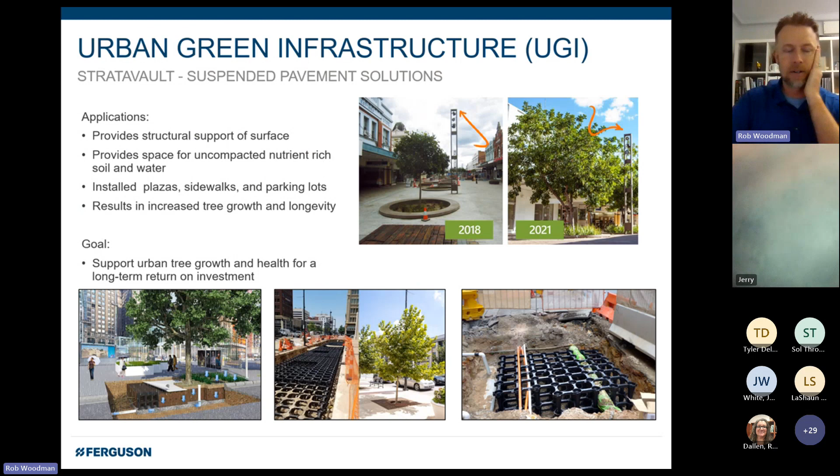Module heights - our tank goes from 9 inches up to 7 feet. With Stratavault, we go from about 17 inches up to about 4.5 feet. That's because the 2 to 4 foot height range is the optimal depth range for the tree root system - that's really where they want to go, not too much deeper and not too much shallower. So we're capitalizing on that sweet spot for the tree roots.

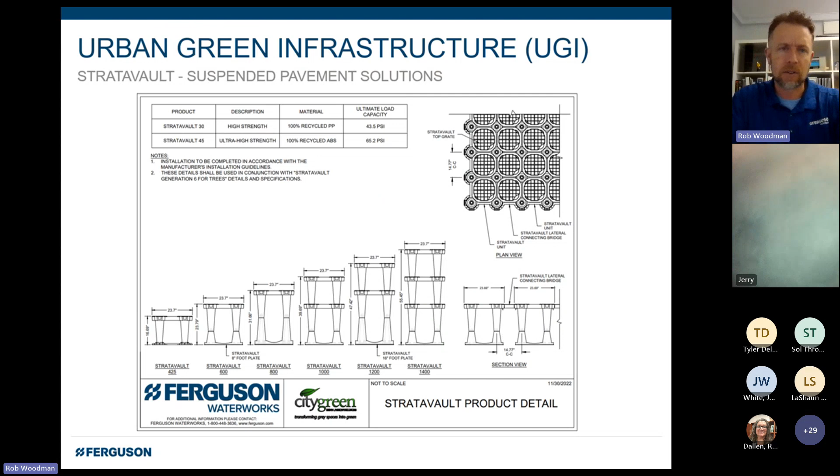And then finally, alternative surfaces. We have a number of permeable and porous surfaces. All of the permeables I work with are geared to having a better story when it comes to life cycle costs. I think some of the early generation products, whether porous asphalt, cast in place porous concrete, or pavers with chipstone infill, have had challenges around the conversation on maintenance, its efficacy, and the frequency of it.

So PowerBlock, which is our own brand product, is an open joint permeable paver. It's a solid, not porous, precast concrete block, but it has an open quarter inch space around the block. This is a 3D printed model, but you'll notice on the sides we have these spaces built into the block - these quarter inch spaces so the blocks can't get too far apart nor too close together, maintaining that quarter inch space.

But with that open 1/4 inch space, we're not putting any aggregate infill in there, not any of that chipstone in there. While that often happens with permeables, that's the place where a lot of sediment and silts will gather and kind of clog at the surface. So with maintenance, you're having to remove all that sediment and the stone and then put new stone back. With an open joint, maintenance is really a one-step process. From time to time, you're going to spray and suck and get out that accumulated sediment in the open spaces and restore it to its original performance.

So our conveyance rates are kind of meaninglessly, stupidly high to some extent. The idea that you would need to work at 1,000 inches per hour means you've probably got quite a storm event on your hands. But we're rapidly conveying that runoff through the surface, so you're not going to get the run-on that you get from other paved surfaces. High conveyance rates, we could use R-Tank in there. In a lot of states that need water quality, they'll add a sand filter or a mineral course in there for filtration. But the real win is those low life cycle costs.

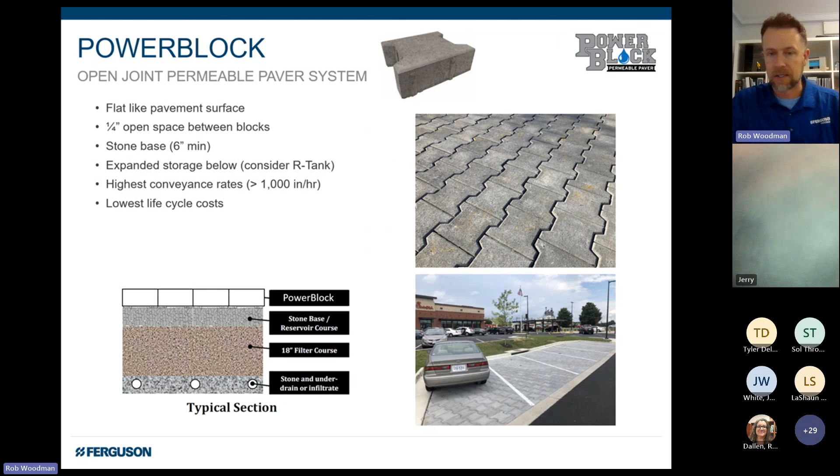You're not going to maintain this anywhere near as frequently as you would a typical permeable surface. And when you do it, it's simpler and quicker. And so we're finding, especially on the municipal side, the open joint system making a lot of sense to folks who are considerate of life cycle costs. It supports traffic load rating. The block is actually 4.5 inches tall, so it's a nice beefy block. So it's suitable for commercial, ADA compliant.

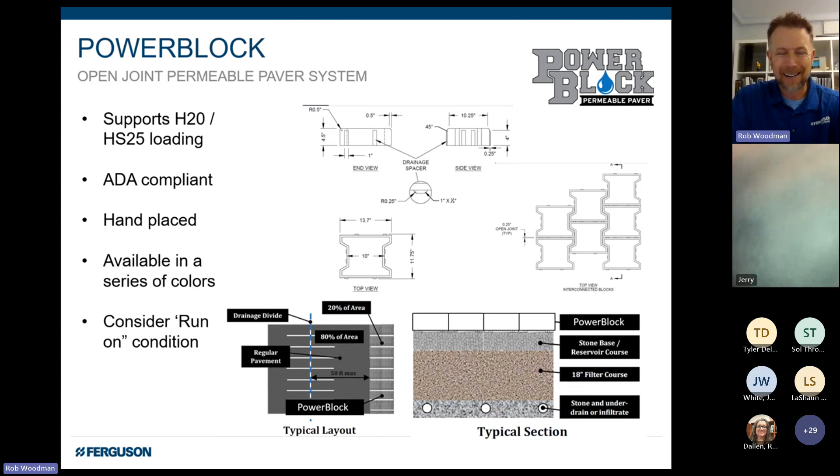Hand place it. It's available in colors. That's not a coating to the block. That's actually a color that's mixed into the paver itself, into the concrete itself. And again, a lot of folks say, hey, I don't need to use PowerBlock everywhere. Let's put it in strategic locations. Maybe we'll use regular pavement in the drive aisles and the permeables in the spaces. So that's kind of what you're looking at for PowerBlock.

As an alternative to PowerBlock, and maybe less so for parking spaces, more so for municipal gutter lines, we work with Stormcrete, which is a precast porous concrete panel that's used throughout the country. It was really developed to overcome a lot of the challenges folks have had with casting in place porous concrete. When you cast in place porous concrete, conditions have got to be a certain way. You've got to have the right mix design. You need the right QA/QC in the field. How do you place it? How do you reinforce it? How do you densify it? How do you protect it and cure it after it's placed? People have had their challenges with that.

So Stormcrete kind of takes a lot of that guesswork out. It's made in a controlled environment, so it's consistent, repeatable, panel to panel. So you get that consistent performance, no worries about the field conditions. You can pretty much place it any time of the year. It also has hidden lifting points, so it's easy to place. And then it's also easy to pick up.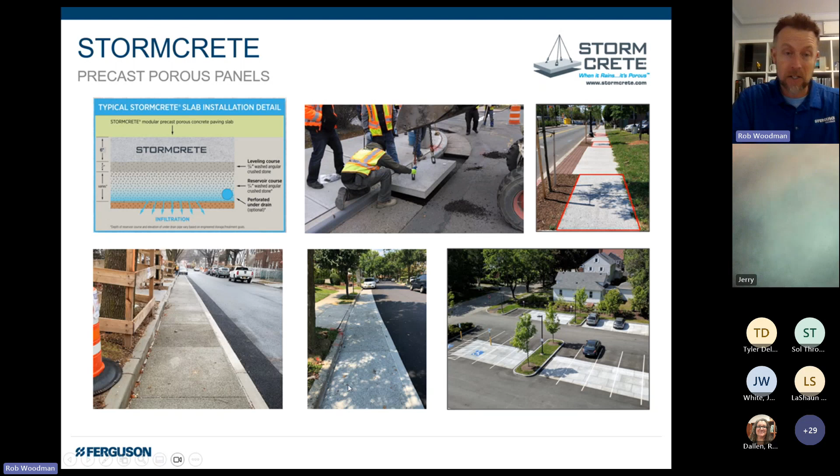So if you had to access your utility under there, or you had a panel that cracked because the subgrade was poor and you had to replace it, or even a panel that was completely clogged with sediment and you couldn't restore it from the surface, you could pick it up, turn it on its side, pressure wash both sides, and try to restore those pathways or the pores through the system. So it's really nifty. Again, you can see the kind of applications, gutter lines. It's a 2-foot wide or a 4-foot wide panel. Here's a 2-foot example out in California. Again, you can see those lifting points being used to place it.

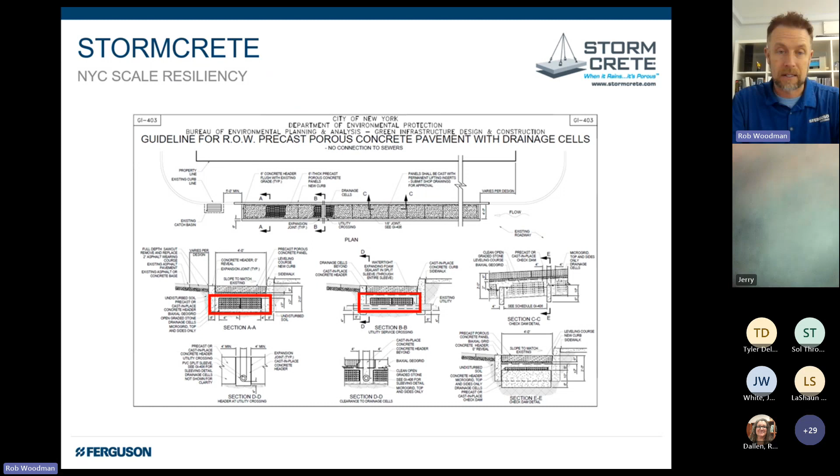And like I touched on earlier, New York City is now using this Stormcrete product for miles and miles of porous right-of-way gutter lines. And underneath that gutter line is our XD panel, either 3 panels high when it's 2 feet wide, or when the Stormcrete is 4 feet wide, it's 5 panels high. So we're trying to keep everything super shallow, with the goal of not conflicting with utility service stubs and things like that. And then the last product in that family is the EcoRaster.

So EcoRaster is our grass and gravel solution, or a plastic grid system. I'll be honest, there's a lot of products in this space. The only one that we really promote to folks is this EcoRaster product. It's made with low density polyethylene, so it's a little more flexible and a little less brittle in the colder months.

You'll see here it's like a 13-inch square. It's even listed on the table here, but it comes pre-assembled in 3 panels by 4 long, so you're sliding about 14 square feet off at a time. So it's a nice large panel, which means installation is very rapid. We have the highest filled strength on the market, which is good too, so we can handle some really extreme loads. It's going to stay where it needs to go.

And we have 2 thicknesses we work with. The E40, which is our all-around product, which is 1.6 inches tall, and then a little bit thicker, with a slightly thicker wall thickness, is the E50 that we use for heavy duty applications. It's a great little system, easy to get together, very difficult to get apart.

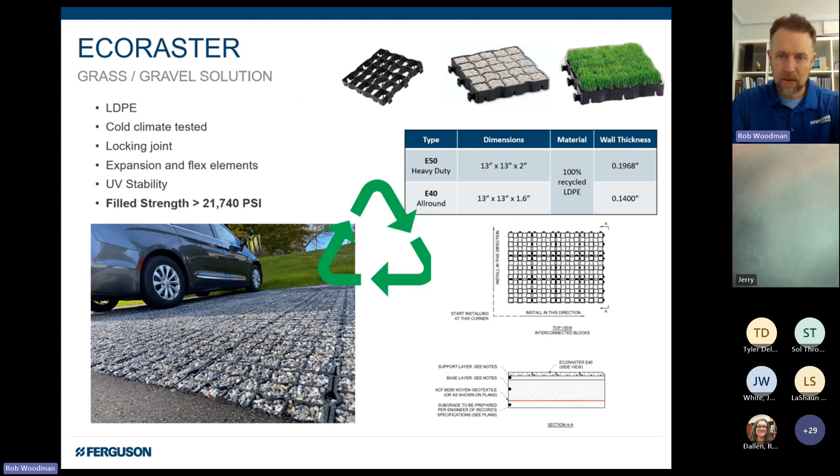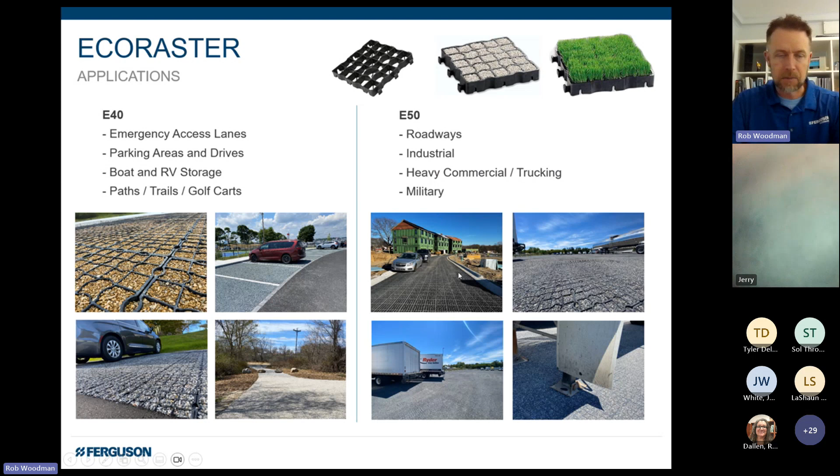Most of the time we're using E40 for our emergency access lanes, fire lanes, things like that, parking areas, drives, paths, trails, et cetera. E50 we kind of reserve for true roadways, industrial heavy trucking, where you're getting almost all trucks coming in, places to park and offload, as well as military and things like that. So 2 great little solutions there.

There's also a paver product in that family. It's a little bit redundant with Power Block, but this is called the Bloxx. It has a drainage channel around all 4 sides, and it seats 4 concrete pavers, but it perfectly matches up size and shape with the E50. So you can do some really interesting layouts if you like doing Legos as big kids, or kind of want to mix the hardscape with the softerscape. And being concrete pavers, you can use different colored pavers as your lane markings and things like that versus typical paint. So cool little system there.

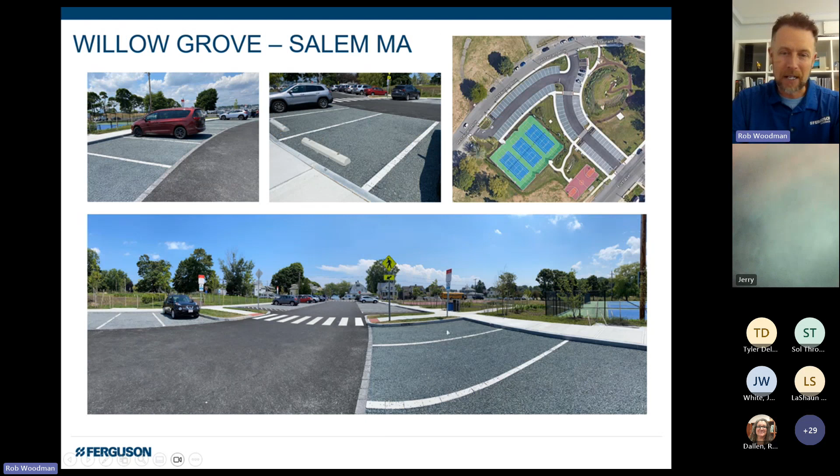If you want to put it all together, you can see a few examples of ways we've put both E40 for hand carry canoe launches to Bloxx in parking lots, and worked with radiuses with the E40. And in Ann Arbor, Michigan right now, I'm working on a project with a really interesting developer called Thrive Collaborative, who are doing a highly sustainable development, net zero everything, really trying to minimize their carbon footprint and address any kind of carbon offsets.

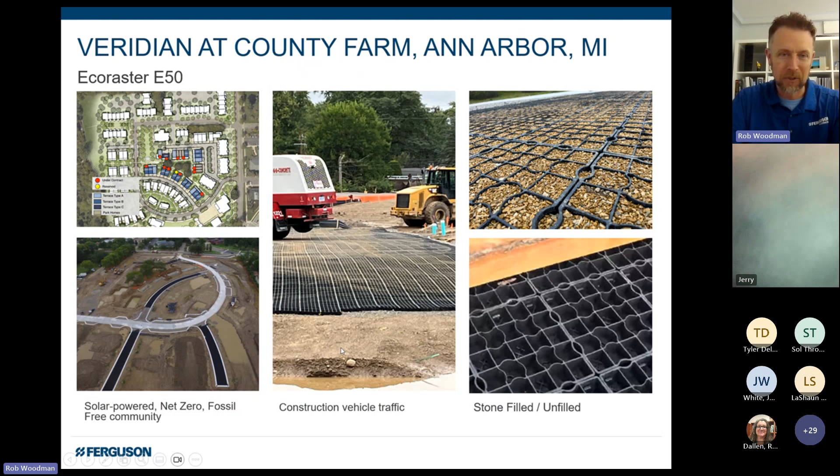So the only concrete being used in this project is in the foundations of the building, and unfortunately one road that had to get put in before we finished our approvals. But we were actually able to get approval from the City of Ann Arbor, both fire and utilities and all the different groups there, to use stone-filled EcoRaster E50 as our roadways instead of asphalt or concrete.

And you can imagine that was quite a process to get through on the planning board side of things, because a lot of folks are just very comfortable with concrete and asphalt, and the idea of a gravel surface just sounds very ruttable over time. Obviously, with the EcoRaster, we're confining that material, and we don't have the same ruttability issues.

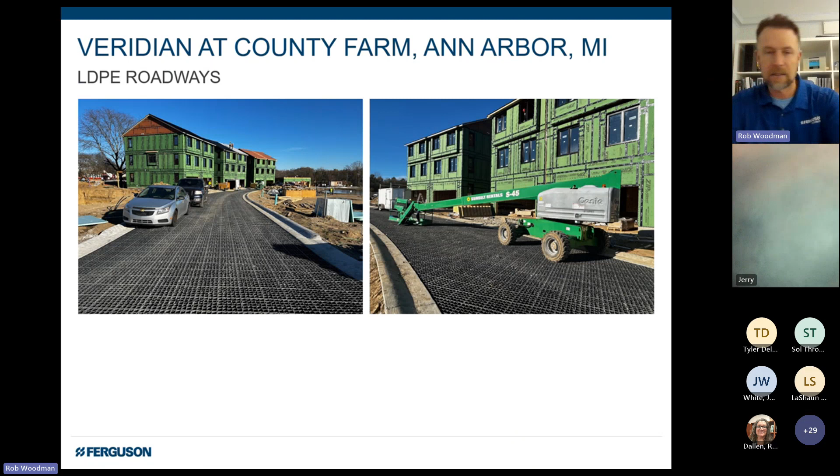And interestingly, we actually used it temporarily for concrete truck access, and then they picked it up, hosed it down, and used it to place in the roads. This will be further along this spring, and they're actually using different color aggregates to help delineate crosswalks and things like that too.

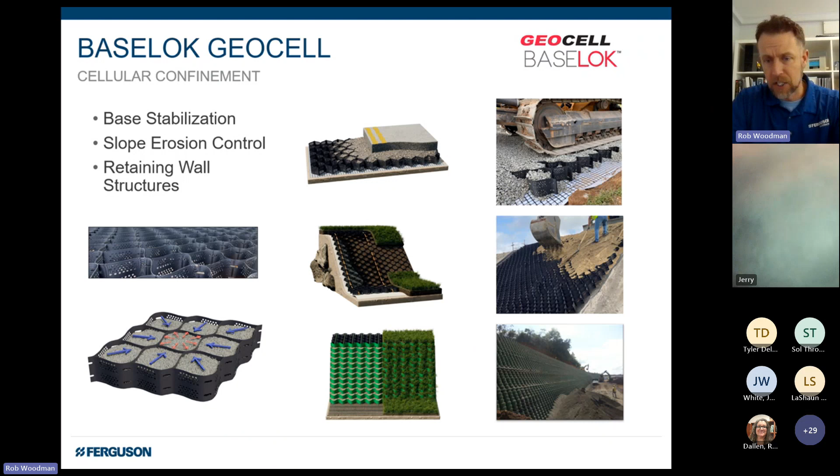And then the last thing I'll just touch on, just as a teaser again, we do a full set of engineered erosion solutions. So cellular confinement, vegetated walls, vegetated slopes, alternatives where water meets the land in terms of scour protection, or vegetated alternatives to riprap, different ways to do softer nature-based outfall locations. We got a lot of different things in that category.

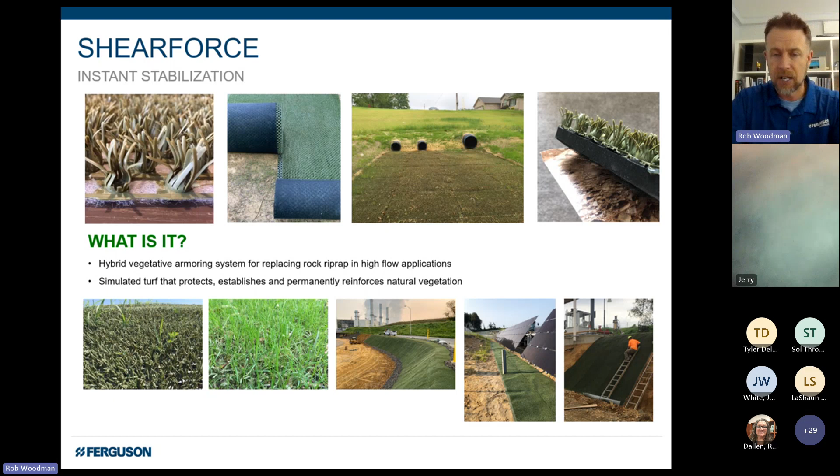Again, this is not about, hey, we got a bunch of products, I hope you use them, or I hope you recommend people to use them. We've got a great engineering team that I've been able to build as part of the structure I lead at Ferguson. So we have a great team of engineering designers. For every project we're working on, we create custom site-specific layouts, overlays, detail sets for your use. We're familiar with most of the different modeling softwares. We can help there.

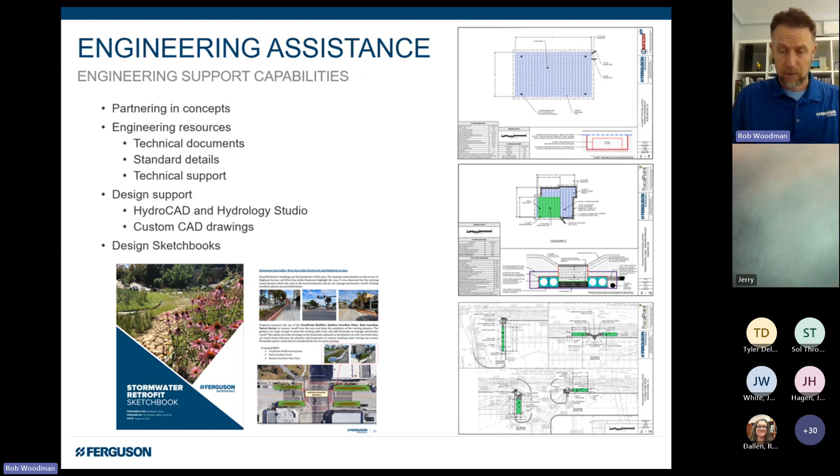We can produce what we call sketchbooks, just early vision casting. If you've got a part of town where you're like, oh, we really want to do GI here, not really sure what we could accommodate, we'd be happy to go walk it, come up with some ideas for you and share that with you in the form of a sketchbook.

Probably the most important thing that we do is participate in construction oversight. Not full-time unless it's required, but we do our own pre-construction meetings for all of our products that go in the ground on the engineered product side of things. This is probably the most important thing that happens, and maybe one of the things that differentiates us from some of our competition. You can have the greatest product in the world, the greatest plans in the world, the greatest design team in the world, even a really good contractor.

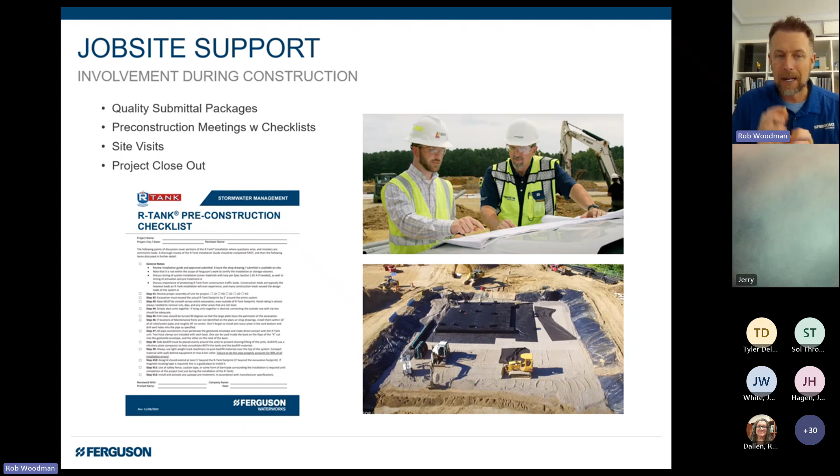But if that communication gets broken between the design and the contractor, and things just sort of go in haphazardly, or maybe the contractor is taking some guesses, that's when things don't go well. So we pride ourselves on having pre-construction meetings. We'll visit the site during construction and help with any kind of closeout.

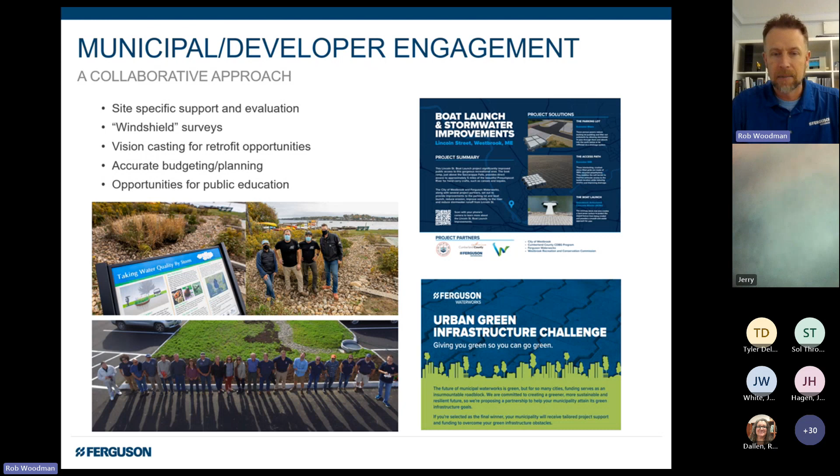And then tying back to my first slide about being passionate about the environment that we're helping protect, we're not just a transactional business. If you need help with maintenance training or education, or you want to help build educational placards or some kind of program, PR event, press event around something you're doing in this space, these are the sorts of things that Ferguson is definitely committed to and interested in. And if there's ways that we can be helpful to you with some of your programming and other things you're doing, we'd be more than happy to have a conversation and see if we can help.